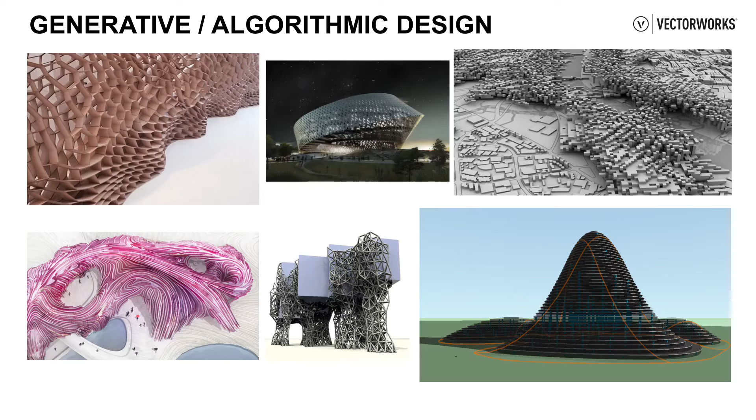But algorithms that are based on programming languages are kind of difficult to learn, to use, and especially to decipher. They lack the immediate results and malleability needed for the design process. So Marionette employs a familiar and easy-to-use flowchart metaphor to allow you to assemble useful programs using wires to direct the flow of data and create your design. Most importantly, these programs are easy to understand and easy to modify by people who don't have a programming background.

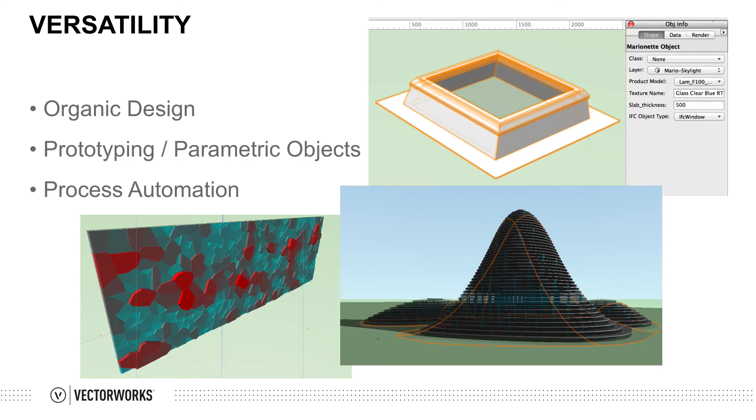We designed Marionette to be fully integrated with Vectorworks' complete range of CAD and BIM capability. This means that not only can you use it to create organic designs, but to prototype custom parametric objects and to automate other design processes. Over the next few sessions, we'll lead you through an in-depth training that will expose you to the full range of Marionette's capabilities, but really, your imagination is the only limit.

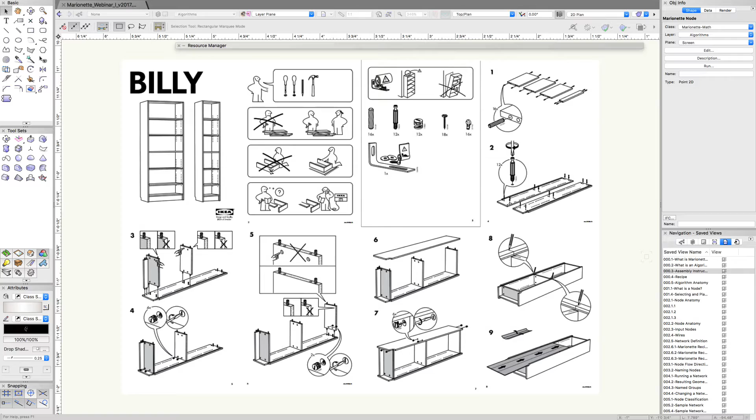Every algorithm needs two things: data and operations. Data, or parameters, are the pieces of information you start with. Operations are the actions you take or the commands you apply to your data. In mathematical terms, data are your variables and operations are your functions. In our assembly instructions, we have information on what tools and parts are needed to complete the assembly, as well as how to put them together. We have our data and our operations.

Or in a recipe, the data would be ingredients and their amounts, and the operations would be the instructions for combining those ingredients. With Marionette, you can create algorithms using nodes from its node library. Nodes are the individual pieces, each datum or operation, that make up a script. This library of nodes can be found by clicking on the Marionette tool in the basic toolset. When you click on the tool, you see a drop-down menu in the toolbar as well as two modes, insertion mode and debug mode. To access the Marionette nodes, insertion mode must be highlighted. We will get to debug mode later in the webinar series.

When you click on the drop-down menu, the resource selector appears. In the file browser pane on the left, there is a list of node file folders. If you click on a file, a list of nodes will appear in the viewer pane in the center of the resource selector. If you already know the name of the node you are looking for, you can type it into the search box at the top of the resource selector. You can not only search by name, but also by tag. As you can see in the preview pane on the right, nodes are tagged by folder.

To select and place a node, double-click on the node you want, then click once in the drawing space. Like other plugin objects in Vectorworks, the tool remains selected, so clicking again in the drawing space will place another node. To help us understand how Marionette nodes work, we can start with identifying its different parts. Most nodes have both input ports and output ports. The input port is a white circle on the left side of the node where information is applied. An output port is a white circle on the right side of the node where data can flow from one node to the next.

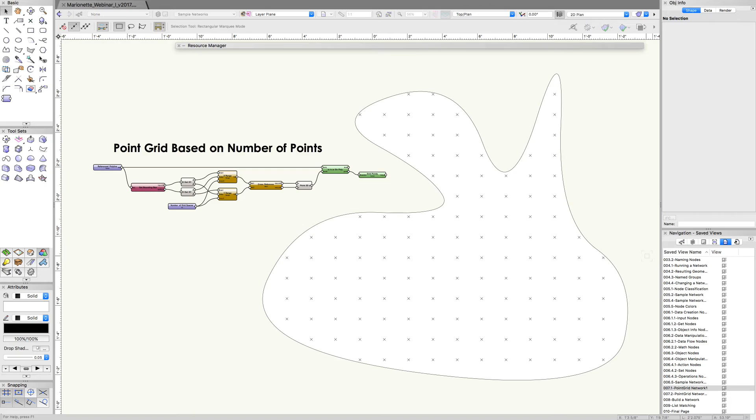If we look at this network, we see that it starts with a name node, an input node that allows you to reference existing geometry in your Marionette network. So we know that before we start building our Marionette definition, we must first create some starting geometry. So let's draw our own polyline.

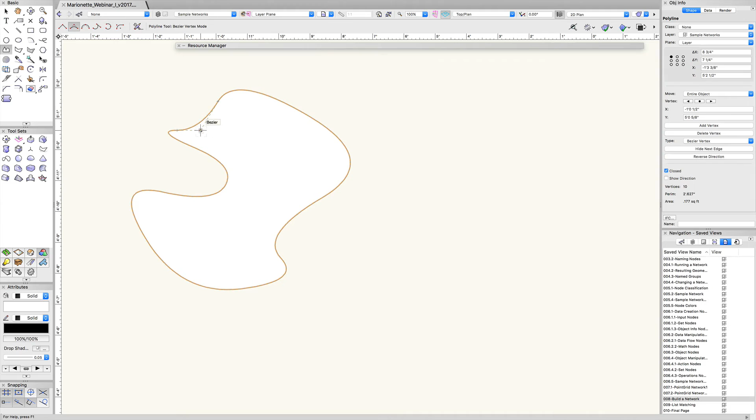Once we have our polyline, we need to give it a name in order to connect it to a network. In Vectorworks 2017, an object can be named by typing in a name in the box at the bottom of the OIP in the Shape tab. In prior versions of Vectorworks, this box was under the Data tab. Since we are going to be using this name again, we can copy it by highlighting it and typing Command-C on a Mac or Control-C on a PC.

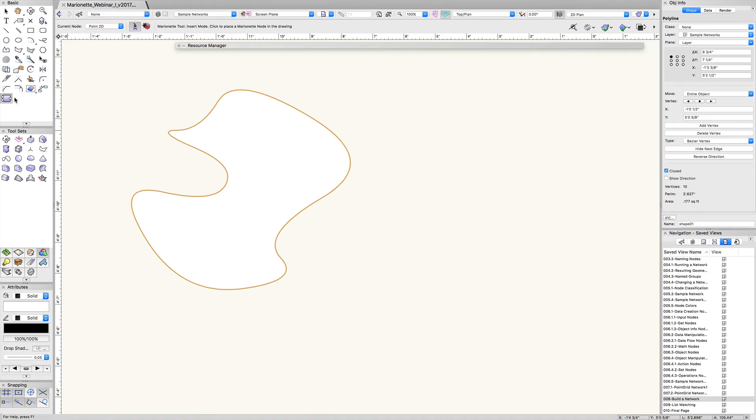Next, we need to get a name node. The name node can be found in the input folder in the file browser pane. Now we place the name node in the drawing, type X to exit out of the Marionette tool, and paste the name of the polyline into the box labeled Name in the OIP by typing Command or Control-V.

Next, we want to uncheck the box labeled Create Duplicate Object. This box should be left checked if the Marionette network will change or delete the geometry in some way, but since we are only referencing the geometry, it's not necessary.

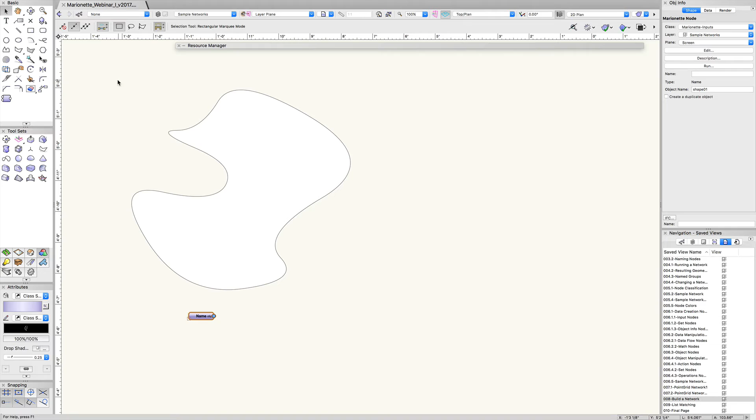Now that we have referenced our geometry, we need to get its location in the form of coordinates. Let's go to the Object Info folder and find the Get Bounding Box node. As we mentioned earlier, nodes with get in the title are used to extract data from an object. Get Bounding Box will give us the top left coordinate and the bottom right coordinate of a rectangle that fits around the object. Now let's connect the Name node to the Get Bounding Box node.

The top output port is the top left coordinate and the bottom output port is the bottom right coordinate. The top left coordinate will give us the minimum x value and the maximum y value, while the bottom right coordinate will give us the maximum x value and the minimum y value. We want to create a list of values between the min and max x and the min and max y. So first we need to separate those x and y values from each other.

To do that, we will get some xy nodes from the points folder. We need one get xy node for each of the Get Bounding Box output ports.

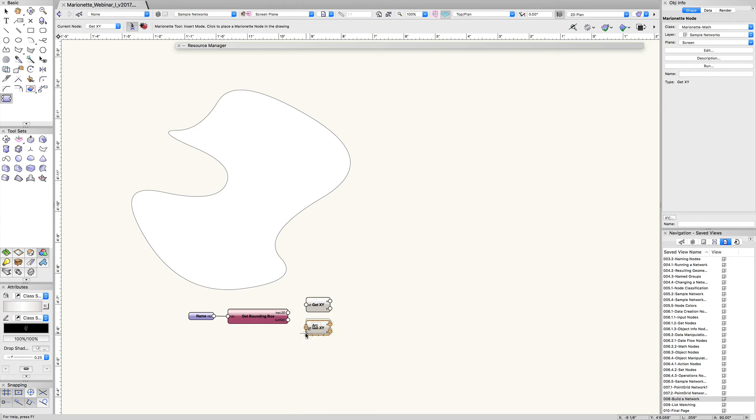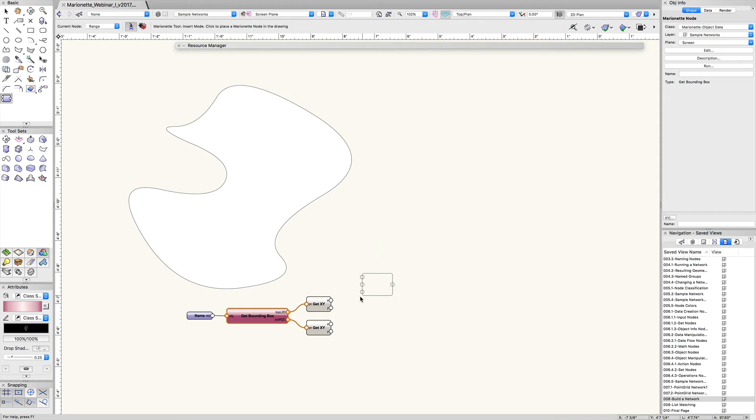Now we have separate outputs for the two x values and two y values. Next, we need two range nodes. The range node is a very useful node that is great for creating a sequence of numbers. Whenever you want to find out more about a node, you can click on Description in the OIP.

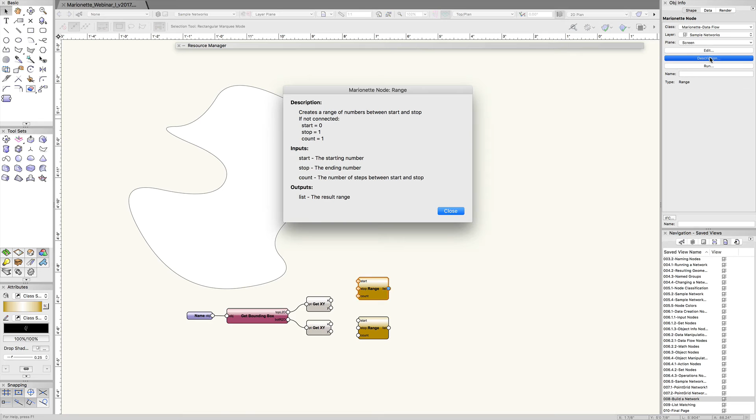The range node creates a series of numbers between start and stop. There are three inputs: the starting number, the ending number, and the number of steps between start and stop. The first range node will be for the x values, and the second for the y values. So let's connect the top left x, the minimum x, to the start input, and the bottom right x to the stop input.

Next, we will go to the second range node, and we will connect the bottom right y, the minimum y, to the start input, and the top left y to the stop input. Now we need the number of steps in the range. Let's go to the Inputs folder and get an integer node.

An integer is a whole number, and in Marionette it is used for counting and numbering as opposed to measuring size or distance. Since we want the same number of steps for both the x and y range, we only need one integer node, and we connect it to both our range nodes. Let's take this opportunity to name a few of our nodes, just for our own reference. First, we can name our integer node number of grid spaces, and also give it a value.

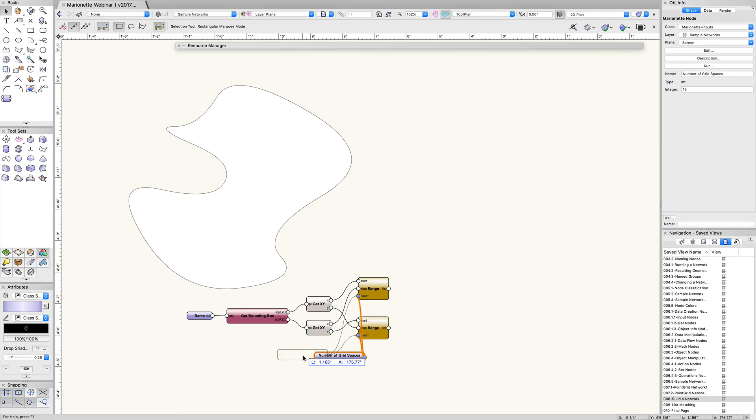And then we can name our different range nodes x range and y range. Now we need to combine our two ranges. Whenever you want to compare or combine two lists, you will probably want to use a mix2 node, which can be found in the data flow folder. This is a very powerful node that allows you to mix and match two lists in 4 different ways.

With the mix2 node, we can create lists of the same length based on the shorter list by cutting off the length of the longer one. We can create lists of the same length by repeating the last value of the shorter one until it matches the longer one. We can create lists of the same length by cycling through the values of the shorter one until it matches the longer one. Or we can cross-reference all the values.

This is done by repeating every value of the first list the length of the second, and cycling through the second list the length of the first. The result is 2 lists that have the number of values that is the length of the first times the length of the second list. When you match these 2 lists together, you see that there is every possible pairing of values between the 2 lists.

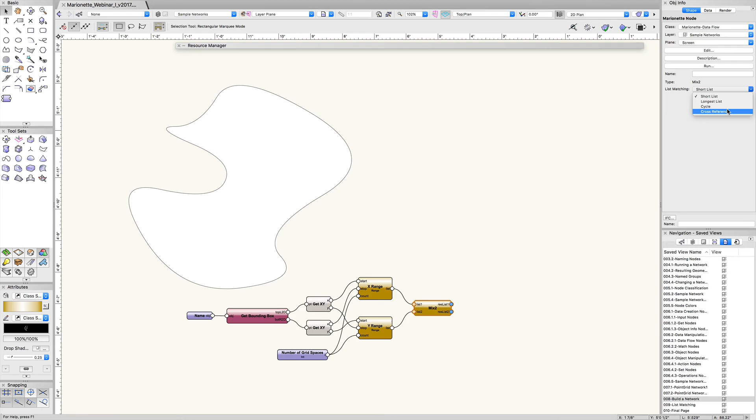Let's go back to our network. We want every possible combination between our x and y values, so let's go to the OIP of the mix2 node and choose cross-reference. Whenever I use a mix2 node, I like to name it based on the list matching I choose, so let's name this node cross-reference.

Now we need to make points from our list of x and y values. So we will need a point2D node from the point section. This will combine our list of x and y values back into a series of xy coordinates. Now we have a network that creates a list of 2D points that overlay our polygon in a grid. If we want to see these points, we need to create a locus for each point.

So let's go to the drop-down menu and get a locus node. You can find it in the locus subfolder within the objects folder. Remember too, that if you know the name or the section of your node, you can always type that into the search box at the top of the resource selector. So let's attach the locus node and then run our network.

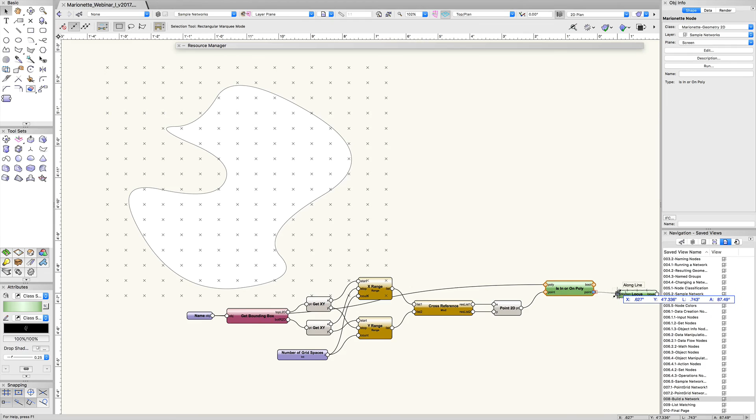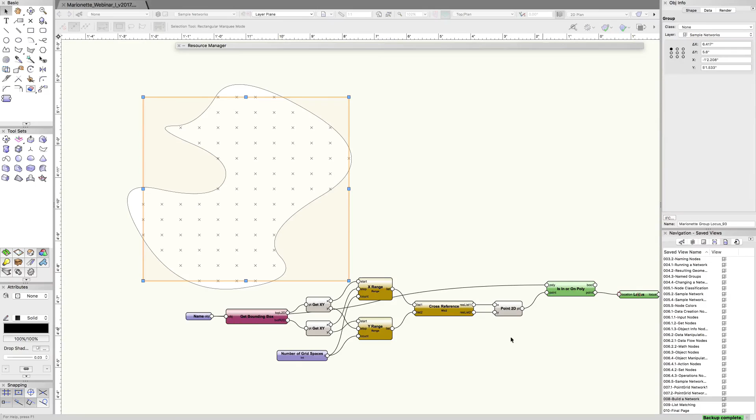When we run the network again, we see that only the loci with points that are inside the poly are drawn. Now that we have this network, we can start to make changes if we want. We could change the number of grid spaces and then run the network again.

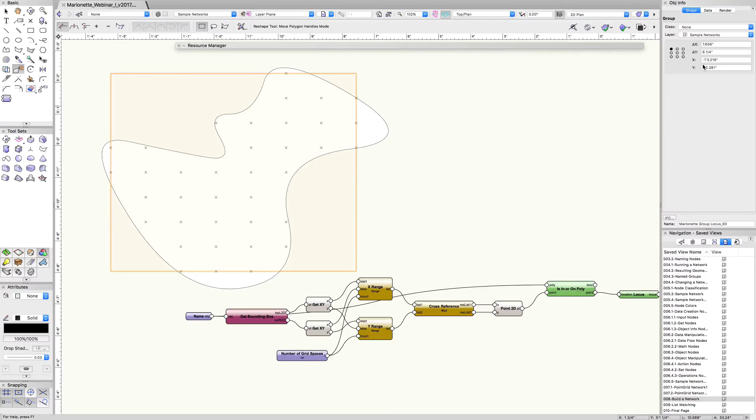Or we could change the shape of the poly. And then run the network again. The design possibilities can really open up once you start using Marionette. Do we have any questions?

Is there a library shortcut? Yes, there is a way to search the node library. Instead of clicking on a particular folder and selecting a node, you can type in the name of the folder into the search box at the top of the resource selector. Also, if you already know the name of the node you are looking for, you can type that name into the search box.

Can you use the Align Distribute tool to organize nodes? You can to a certain extent, but the wires that extend from the outputs of nodes are included in the node's bounding box, so aligning and distributing connected nodes can get tricky. Aligning left is never a problem, but other alignment options can be.

Is Marionette specific to Vectorworks Architect? No, it's not. Marionette is available to Landmark and Spotlight users as well as Fundamentals users. I believe Marionette can be highly beneficial to many types of designers because it is a tool that helps automate processes, and these can be any process, from creating geometry to laying out a light plot to creating a database.

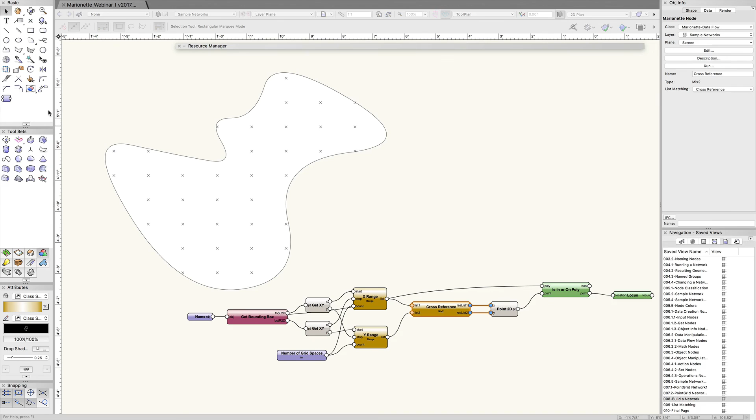How do you know the kind of input to apply to the node? Well, there are a couple of different ways to figure out what types of inputs are appropriate for each node. If you look at a common node like the rectangle node, there are 4 inputs. The names of the inputs try not only to describe the type of input, but also the purpose of the input.

For example, origin refers to the bottom left point of the rectangle. The name of the input could have been point because that is the type of input that the port takes, but that would not tell the user which point on the rectangle. Bottom left point would be too long, so origin is used. Since the input port names are only one word and often abbreviated, it can still be unclear.

To learn more about the node, you can click on the Description button in the OIP. In the Description dialog box, there is a brief explanation of the node as well as descriptions of the different ports. If you are still unsure as to what type of input to use after you read the description, you can click on Edit, and this opens up the script editor that shows the Python code inside the node.

If you look at the line that says point = marionette.PortIn, and then parentheses, what is inside the parentheses is the default value of the port, and then a comma, and then the name of the port. (0, 0) is the proper way to write an xy coordinate with an x value of 0 and a y value of 0. So from taking a peek at the script inside the node, you can get some more information about the node.